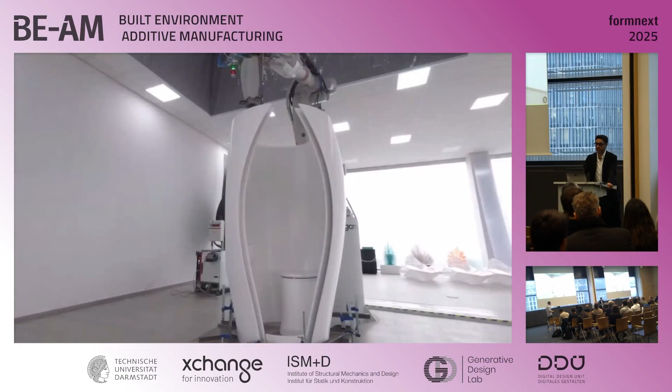So Nagami has been around now for 10 years. Actually this year is our 10th anniversary. In 2013 we started the research at the Bartlett in London, UCL, and 2 years later, with the excuse of a commission from the Centre Pompidou, we decided to embark on this crazy journey. So somehow I convinced my brother and my previous flatmates, who are sitting there, to not sleep for 10 years, and here we are.

Basically, it all comes from the digital. Right now we don't discuss these things, it's assumed, but back in the day, digital in architecture wasn't a thing at all.

Greg Lynn did animate form in the very late 90s. We started thinking about forms and shapes that can be fluid, that you can stop at any given moment in time and materialize in a certain manner, but that is an alive organism.

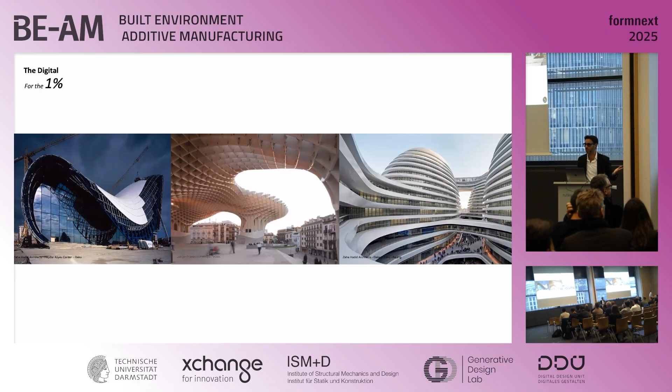The result of that was really hammering through lots of geometric problems, trying to use conventional techniques for materializing these crazy projects. But what came later was a new type of architecture - not just trying to materialize digital architecture through traditional techniques, but actually embedding the future of technology in architecture.

But to be honest, this adoption is becoming rather slow. Construction is the least digitized industry, right after hunting, we were discussing that yesterday. Of course, digitizing hunting wouldn't be that fun.

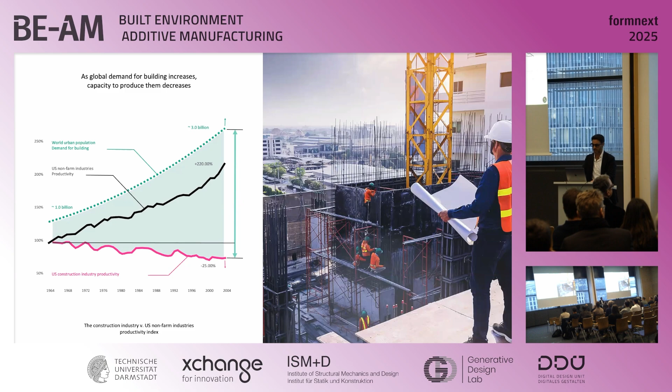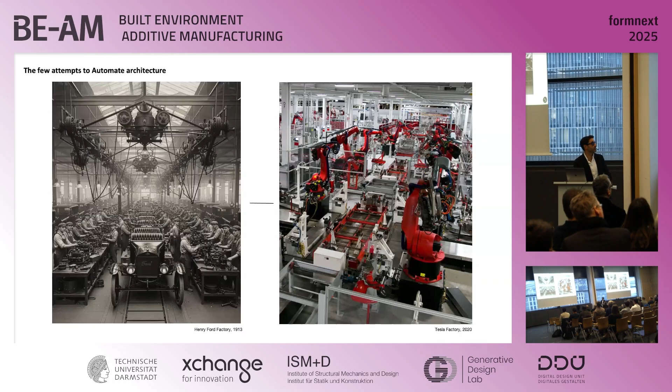And we're actually lowering our production. This graph is from the States, but it could apply almost everywhere. This is how the Henry Ford factory looked in 1913, and right now, obviously, in car manufacturing, things have improved quite a lot. It's a completely different landscape.

However, in architecture, even having that technology - this is one of the most cutting-edge examples of automated architecture, the case of Katerra, which unfortunately went bankrupt - they're really not rethinking design at all. We're still trying to materialize what we understand as a housing building, which was literally the same in the 1930s, in the time of Henry Ford, and we're just trying to automate that process, but not really reconsidering how a building should be and how it should look.

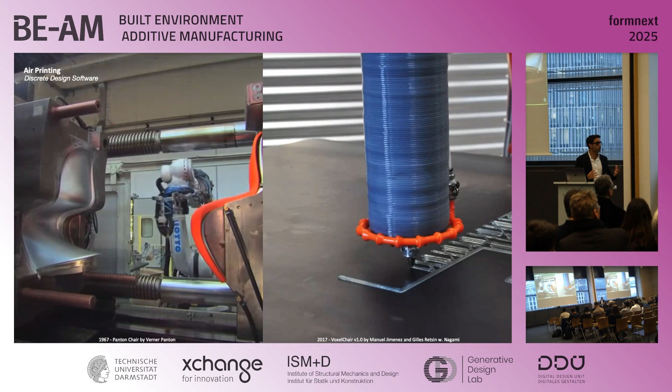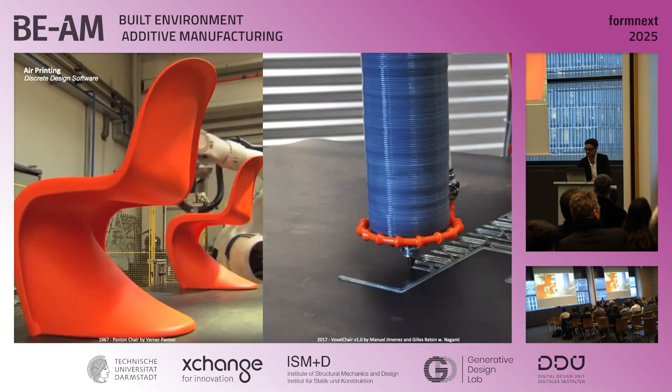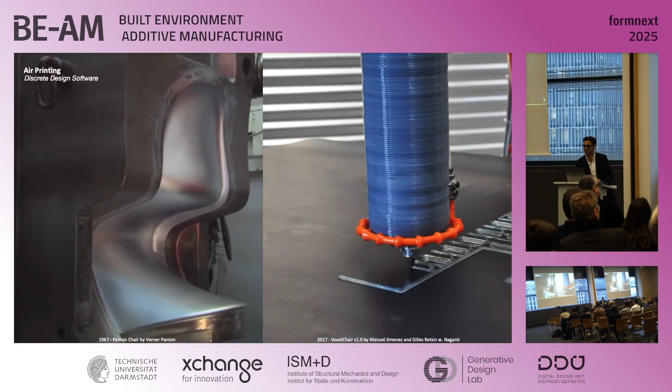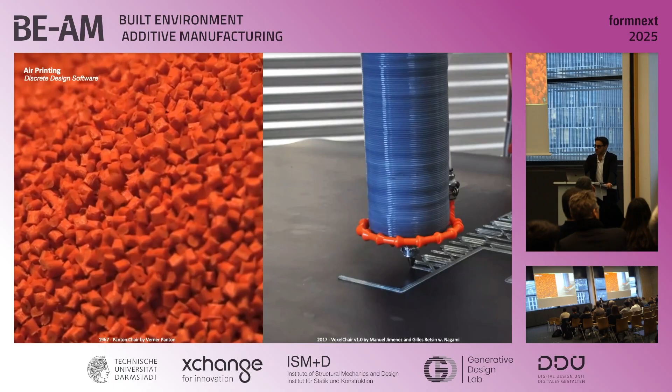In the world of design, this connection with technology is even easier to grasp. The Panton chair was the world's first plastic molded chair, back in the 1960s, not even. But we don't talk about the Panton chair right now because of the technology it used - it was really revolutionary, a new technique for creating new shapes. Right now we talk about the Panton chair and buy the Panton chair because it's a seminal piece of design. And the same thing will happen with 3D printing.

This was also discussed yesterday - this will happen to 3D printing in a short period of time. So probably in the next 5 to 10 years, no one will be talking about 3D printing the way no one talks about plastic molding today. What will stay is the way we use the tool - a tool that will definitely and undoubtedly stay with us forever and already is part of the industry.

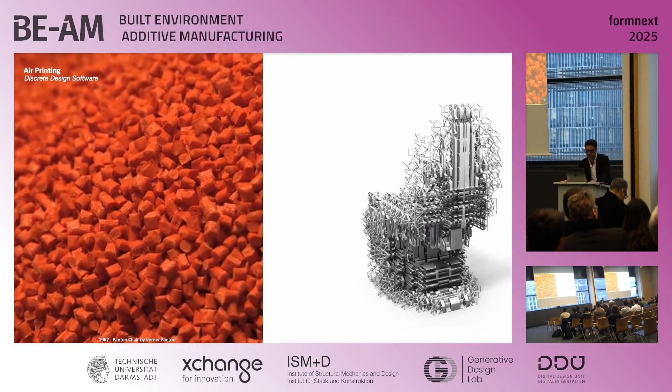We were trying, back in 2015, 2016, when we started Nagami, to really find expressions that are born from an understanding of the technology - forms and lines folded into chairs that truly respond to what plastic extrusion could do. And this was really the beginning.

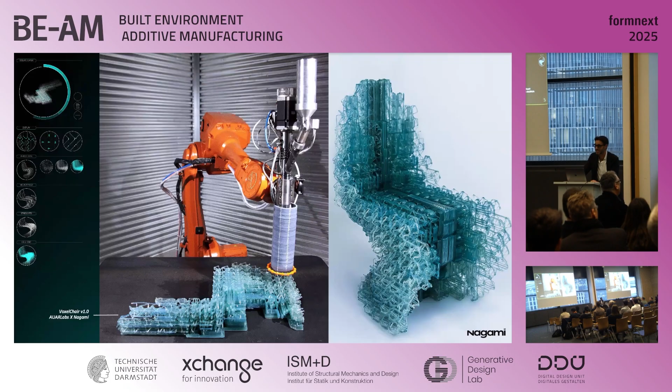This was our first garage with our first second-hand robots in 2016. Back then, my brother and Nacho, my other partner, were just finishing building our extruder. We used our own technology, because there was no Caracol or CEAD or any of these companies building extruders at the time. So we actually had to build our own. In fact, my brother's apartment still smelled like plastic after a year of development. Two architects making a completely novel tool.

But it was important for us to situate waste material - plastic, always recycled or biodegradable or sustainable plastic - on the top side of design.

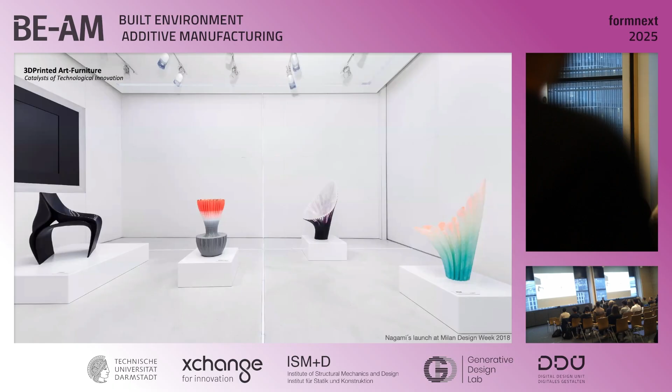We partnered up with Zaha Hadid Architects, Ross Lovegrove, and Daniel Widrig to create 4 pieces that would be impossible to materialize without that technology. We launched them at Milan Design Week in 2018, finding expressions that are even today, almost 10 years later, very difficult to materialize—like printing over an object that's already printed, changing directions, changing colors, with a perfect gradient, pushing some of the limits of 3D printing. As you'll see, I'm not going to play this video, but maybe this other one.

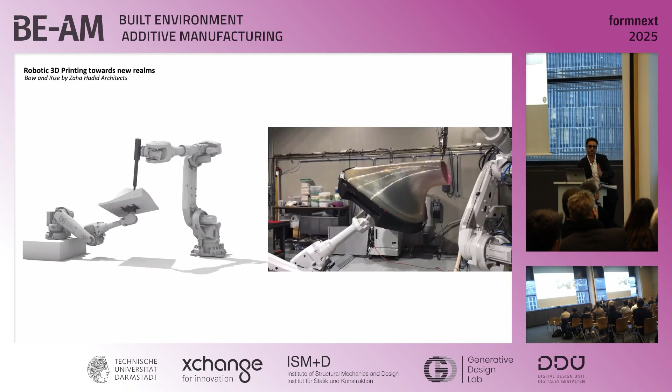Here we pushed the limits of larger scale 3D printing to create angles that go beyond the conventional 30-degree, 45-degree angle—how can we make the best out of this design expression, in this case printing with 2 robots collaboratively.

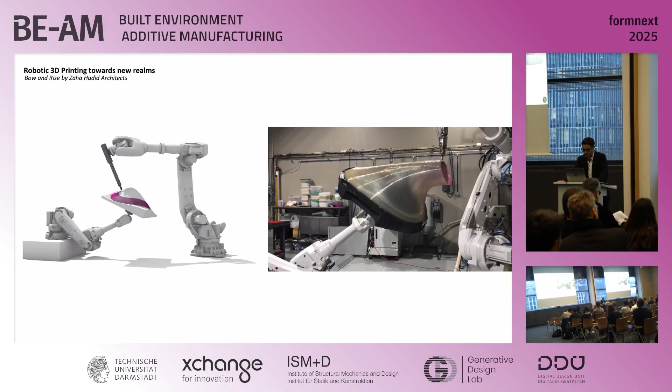That was the way we launched, the way we started trying to create a market for 3D printing. We're talking about 2018, so the only common example of 3D printed chairs was Dirk van der Kooi. There were no brands doing 3D printed furniture, and people were actually afraid of it. When we were exhibiting somewhere, people were doubting if it was okay to sit on the chair because it was printed. Today that's different—everyone just comes to our stand and sits without asking, but that has been quite a challenge.

The biggest challenge was, in creating that market, not making it only for a narrow part of the possible market—marketing, design, and architecture, the collectors, the museums, the ones that can spend 20 grand on a special edition piece—but actually amplifying the reach, widening the market, achieving a very low production cost for 3D printing.

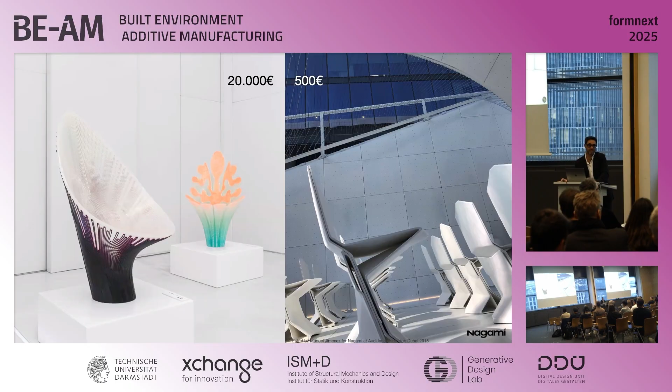There was no example of chairs that could be printed for 300 euros and sold at 500. This is really what makes an impact in the design market.

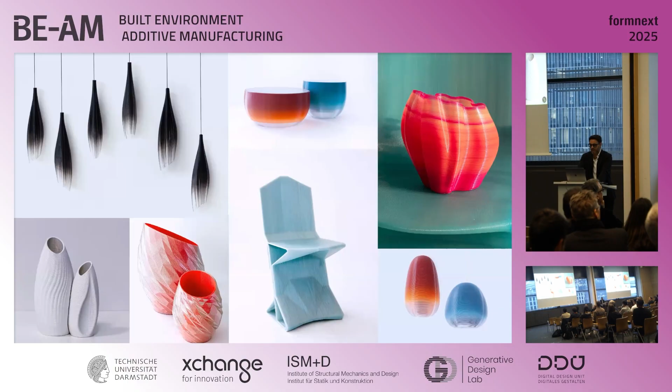So we started growing our catalog, making more chairs, more accessible objects, getting our dogs in the pictures—that was one of the best parts of the story. Getting different colors, different transparencies, different understanding of texture, really making the printing line a form of expression, from the micro texture to the overall macro texture, and combining different workflows.

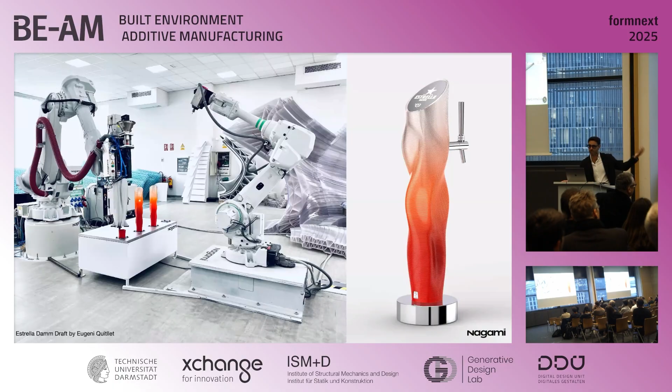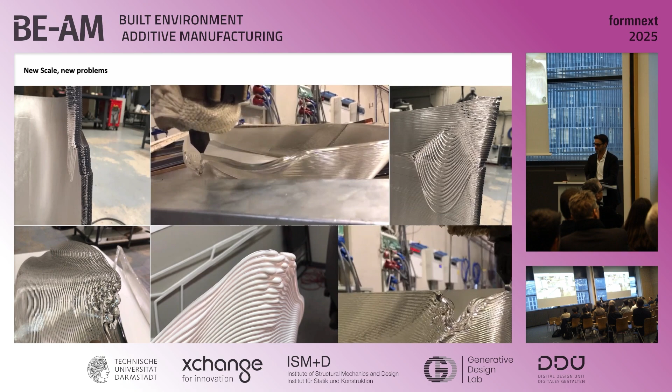Like this beer draft we did with Estrella Damm, where we are printing and CNCing simultaneously, but also taking into account all the possible failures that 3D printing can have at this scale.

We face this a lot with clients or people interested in working with us, asking which format they should send the file in. We always say, just send a sketch and set up a Zoom meeting—the technology is definitely not at the reliability it would be at small scale. We're definitely not a printing service, and I don't believe there is a viable printing service at this scale.

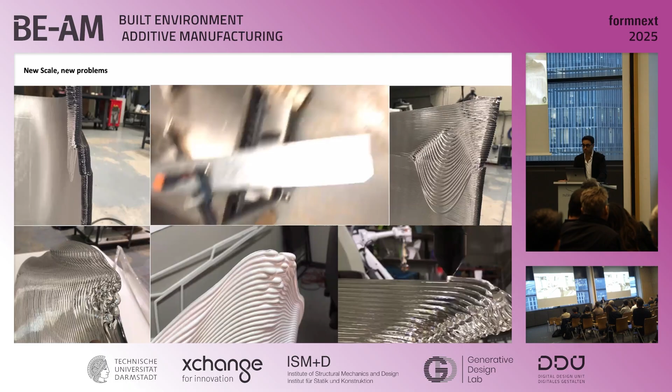There's a more interesting approach where we work together with other designers and other brands to see how to get the best out of the limits and possibilities of 3D printing at this scale. But it's important to know how to push that technology.

For example, this object, this chest, was really pushing the limits—you can see the angles, and probably everyone here knows the technology quite a lot, so we all know it's printed from the side. This took 15 prototypes, 500 kilos of plastic, 300 printing hours, 3 months of rationalization, a lot of fighting, and a lot of headaches.

If we would only sell one piece, this would cost a fortune, and we'd be stuck again in the hyper luxury and inaccessible market. What is luxury in the object but accessible in the price market? For us, that turns a little more conceptual.

It goes back to the understanding of digital architecture, part of which starts to be framed, especially by Patrik, as parametricism. Parametricism postulates itself as the complete opposite of Fordism. Rather than repeating the same single piece every time—Henry Ford used to say it can be any color as long as it's black, so you can't even choose the color—parametricism is the complete opposite: every piece is different. And to be honest, that is actually partly right at this scale.

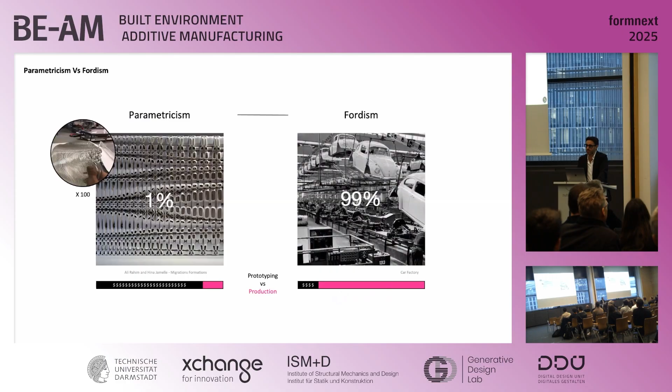And this is what limits the application of this technology to what we always call the 1% of buildings in architectural terms—just the Guggenheims and so on. Because if we want to make every single piece different, and we need that amount of development, we will always incur very high prices.

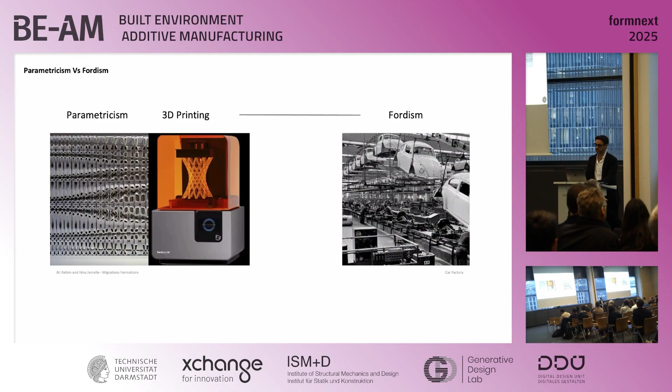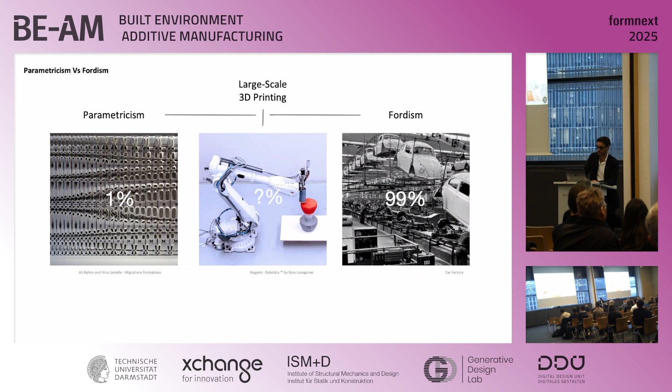So how can we find the right space for large-scale 3D printing? Perhaps 3D printing at a small scale could be much closer to this eternal variation of parametricism. Large-scale 3D printing situates itself in different ground—what we identify as a much higher percentage of adoption in the architectural market, a new space for 3D printed architecture, a sweet spot.

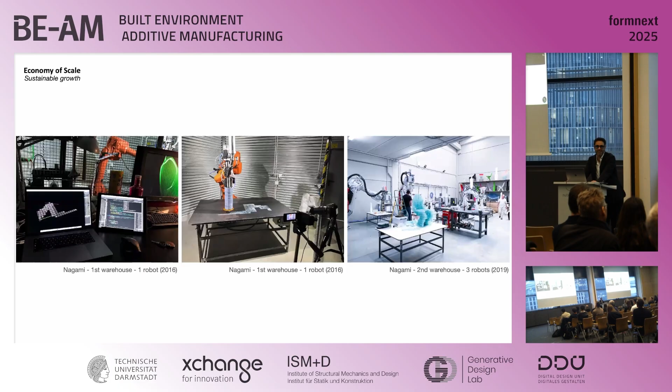So what do we need to achieve that level? First of all, we need to understand 3D printing as a commercial venture. We all started with just one robot, a garage, and perhaps coming from design, from engineering, from fascination about technology.

Today we have 21 robots, and we're really trying to take into account all the stuff that isn't taught in design or engineering school—about efficiency, about cash flow, about really understanding this as a company.

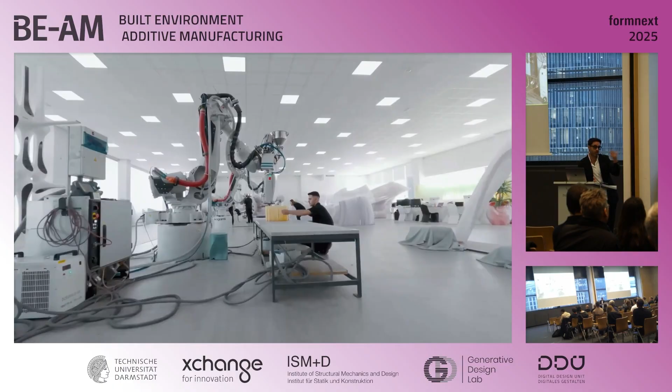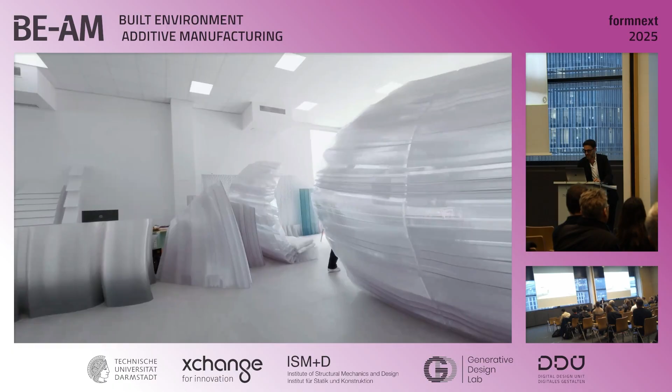What is the optimal product, the optimal rate of manufacturing, and a thousand million things you need to understand to get this into a profitable business. Because otherwise, if it's not profitable, it will just end up dying, and you can't keep innovating. This isn't just about making money—it's because without money you disappear.

This is the lab in the upper level of a 4,000 square meter factory in my hometown in Avila. When we started, we had 5 robots, but we started working on larger projects, and we realized the importance of economy of scale in this kind of semi-industrial business.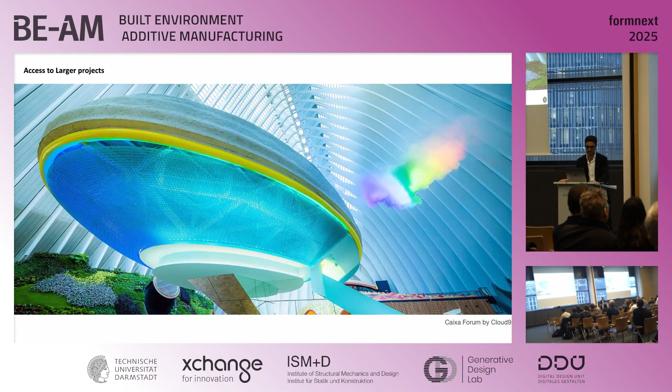So the more robots you have, the lower your production cost becomes. What is the right number of robots for the right number of people, and is that really hitting a competitive price? That question became very evident when we landed a very ambitious project for Real Madrid.

I don't know if someone in the audience supports Barca. I'm sorry—I'm sorry for supporting Barca in general.

So anyway, we basically had 80,000 seats coming from the Real Madrid Stadium, Santiago Bernabeu. We wanted to give the supporters and the fans the opportunity to really transform this seat into something different—a piece of art, a chair, something you can use and enjoy, not just a piece of plastic.

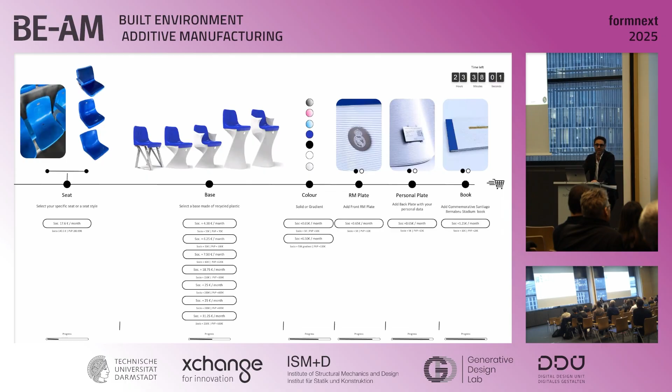So 80,000 is a really large number, and we also made our lives very difficult by giving so many options—there were 7 forms with 7 colors, endless possibilities. We even had to catalog every single seat in the stadium, so there's 80,000 of these pictures.

More importantly, in order to satisfy the possible demands, we had to install 16 new robots. This was only possible because we make our own technology, so it was much more streamlined. We created a new part of the factory in the bottom area with these 16 robots so we could deliver seats in a much shorter time.

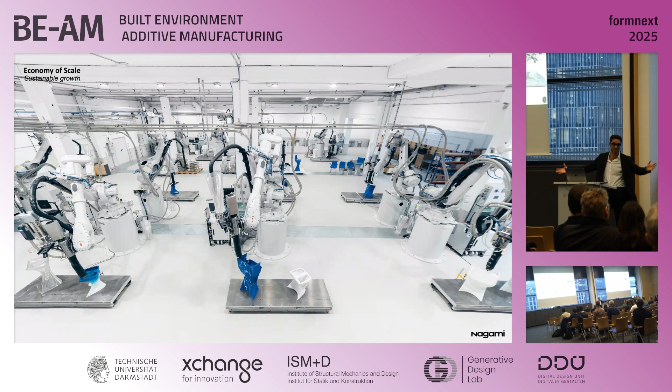So if you can't print faster because of gravity and material properties, then just print more. That was the solution, and it really opened up different opportunities—having a project where you push 3D printing to give so many opportunities to the customer, which you couldn't otherwise. With traditional manufacturing, you'd probably offer just 1 or 2 options of that chair. So this shows how we deal with products, and how we offer customization, but within a controlled range.

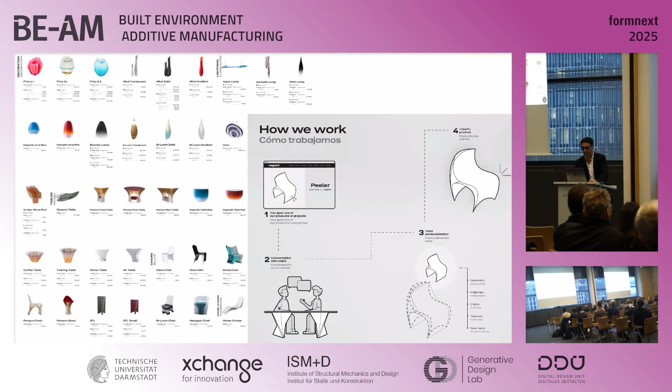So we have a catalog of products with more than 70 references, but we then offer, especially companies, but also individuals, to play out different customization levels with these products.

For example, in this project with the Pereyra Theater in Ibiza, it was a theater closed for more than 16 years, and they wanted to have their own furniture for an edition of 250 chairs, 100 tables of one type, 100 tables of another type, 20 or 200 stools. So it's very short numbers, and there's no technology in the world that could make that like a particularly designed product for just 250, at least at an affordable price.

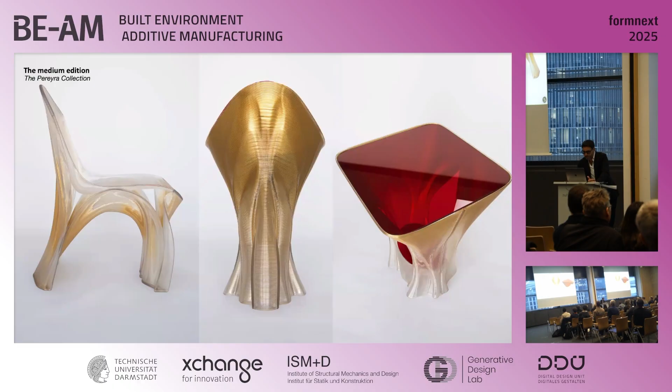And that's where 3D printing becomes the only viable solution. But you also need the capacity to respond to such demand. In the end, it's perhaps like 900 different products to be delivered in a couple of months, so if you don't have 21 robots, you will really struggle to deliver this on time. So we start to play out this idea of being in between personalization, the promise of 3D printing, and getting closer to mass production. It's kind of a field somewhere in between.

The same thing happened with Porsche. Porsche came, saw the chair at Pereyra, loved it, but they wanted a version just for them. So again, a very short edition, 300 chairs made for Porsche, that then started to multiply into the entire atmosphere of this pavilion they were using for launching the new Macan. Getting the textures of the chair into the bar, the chandelier, other products, and even using their space as an arena for launching new products, like these chaise longues and chairs with Karim Rashid.

And all this starts to pose a much wider and probably more important question. I'm an architect, so I ask this about architecture, but you can apply it to your own field: why 3D print architecture? Of course, there's a simple answer - one machine, infinite number of products, so you don't have to deal with stock.

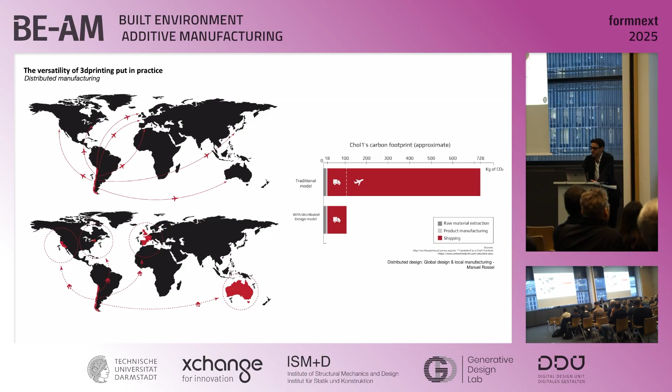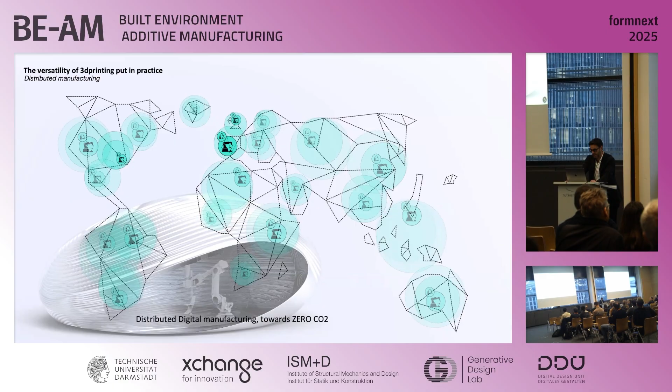Then, another answer this audience knows well: distributed manufacturing. If we manage to increase or widen the market for 3D printed architecture, and have 3D printed hubs in every continent, we would spend much less CO2, and it would also become cheaper, reducing taxes and so on. So we're now talking to distributors and I'm planning to expand the business to different continents this year, to really start working locally with a material we consider an unfortunately unlimited source.

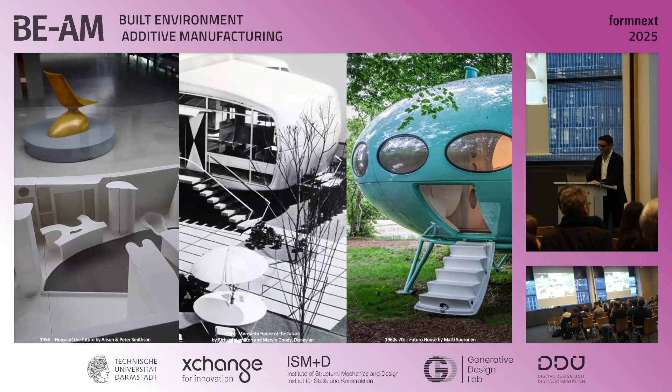In the 60s and 70s, we were dreaming of inhabiting plastic capsules, with fiber reinforced plastic, and having furniture that would come out of the wall, becoming a continuous and personalized space. It all died in the 90s for a simple reason: scientists already knew plastic was going to be with us forever, but in the 90s they uncovered it, and that's what eradicated that whole movement.

But today we have 8 times more weight in plastic waste than in people. So each of us is equivalent to 650 kilos of plastic, which is insane, and this is growing. And again, we're not going to live without plastic, so how can we start increasing the demand for this material?

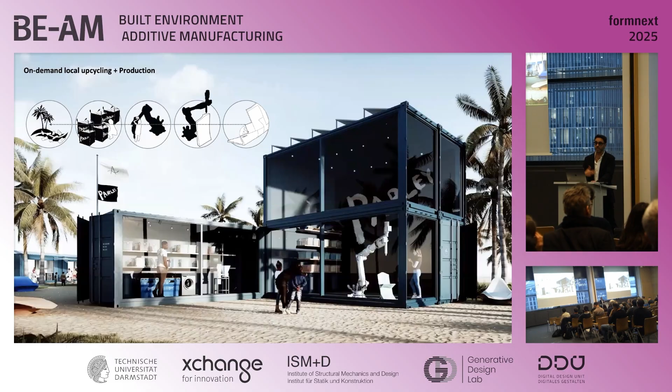We've played out different scenarios. Can we work with environmental organizations like Parley for the Oceans to recycle on site and transform, creating local economies? We've tested this model with on-site printing in Selfridges, in COP26 in Glasgow, and we're really trying to get that model into an industrial setup. So that's probably, if I come next year, hopefully we'll see how Nagami starts to be in other continents as well.

And it all started with chairs. Architects love testing ideas in chairs. Chairs are mini buildings, so they need to resist a human body, and it's way cheaper to test things in chairs than in buildings.

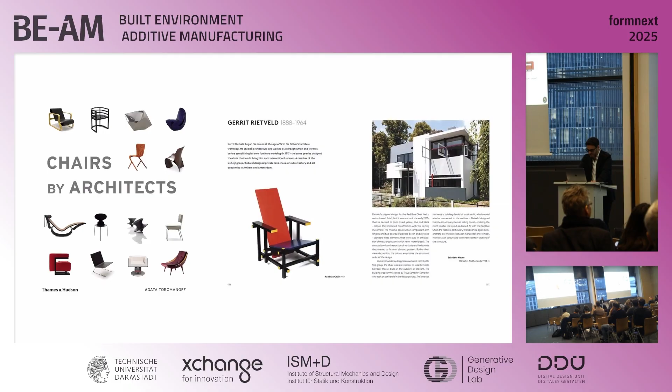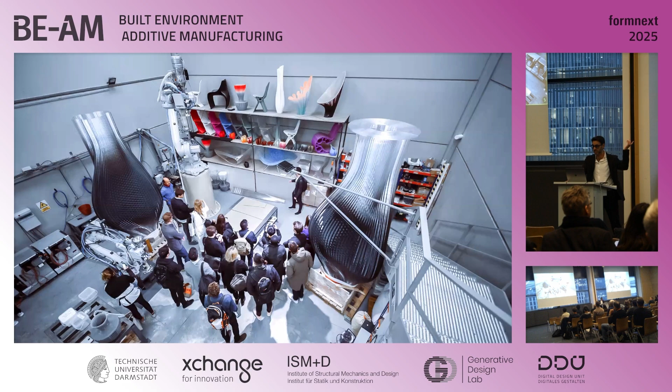For obvious reasons, every seminal chair is actually testing architectural features. So we started going from chairs to much larger elements.

Like this sculpture we did with Ross Lovegrove, 3.5 meters, that we printed in 48 hours. Today we could print it in around 30 something.

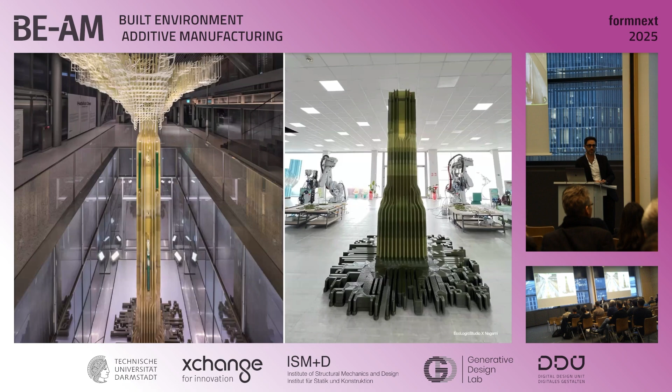And how can this large scale for real start to become architectural? Can we go to 12 meters assembling pieces? And how can we assemble these pieces? So we start really dealing with questions that have been present in architecture forever, but that we didn't have to rethink because we didn't have another technology.

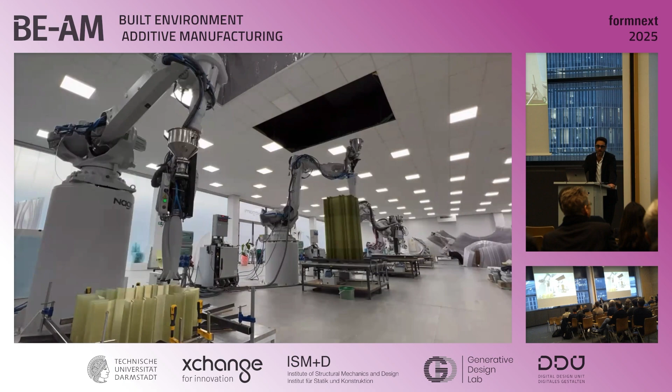Like how can you connect efficiently two 3D printed pieces? How can you waterproof 3D printing? How many layers do you need to have? What is structurally viable? Fire testing, coating, etc. So there are so many questions that start emerging when you go to this truly large scale.

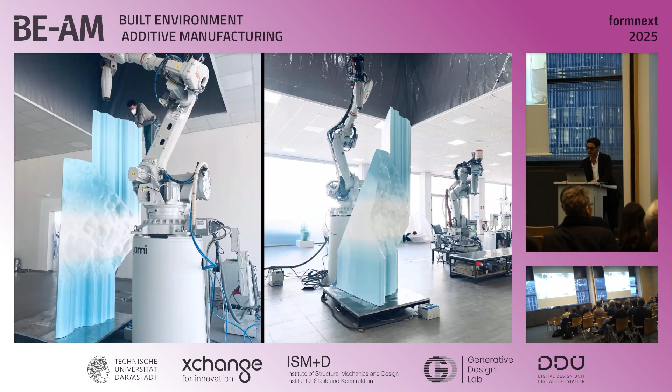And we tested this in different scenarios, like this 3.5 meter sculpture with Nicolo Casas, partly for the oceans, or this facade we did for Christian Dior in Marbella, where we really needed to investigate the deformation of the panels so that we see what's the maximum size that we can print.

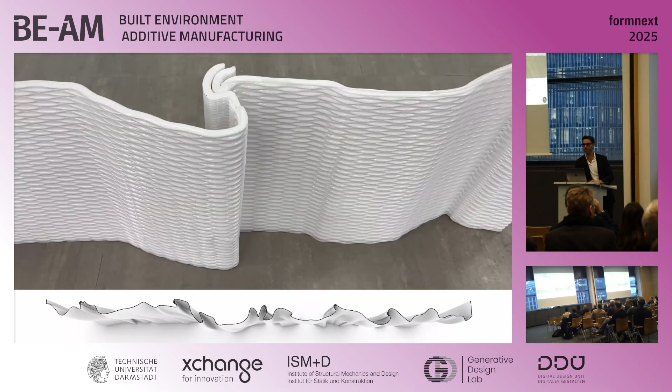Connections are now becoming part of our everyday life. We think more about connections than other parts of printing features. 3D printing allows us to hide these connections, to give this effect of continuity, like having 9 meters in 6 panels that really look like one, to really start playing with the continuity of lights, and really go into retail spaces and make them shine.

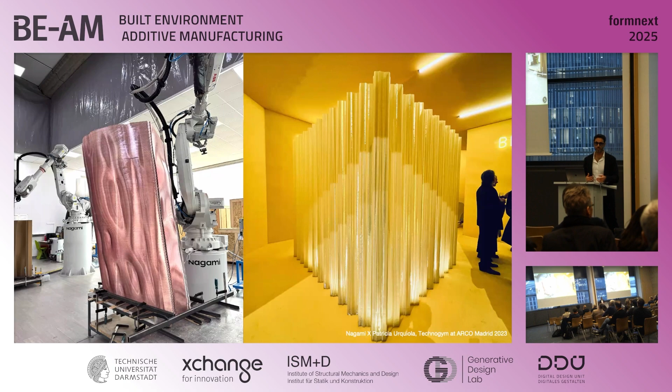Create something completely particular for them that is also kind of screaming sustainability. Most of the time we work a lot in high-end retail especially, and also in hospitality. These guys are renewing their shops every 6 months depending on the brand, and they used to just take it all and throw it to the bin on one night. We take the material and shred it in our own facilities and repurpose it.

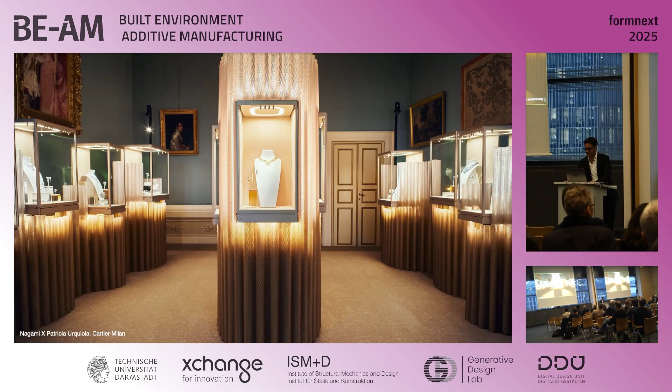And we're working in that direction with different brands. Many of them I can't talk about yet in this presentation, but we've been showing a little bit, this is Cartier, for example, with having kind of their own expression, their own texture.

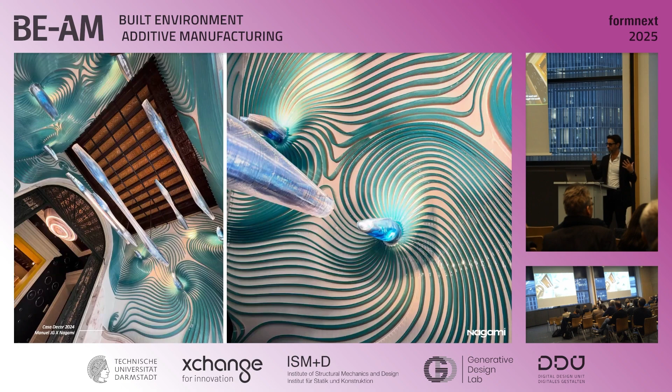We've investigated in the full interiors where the furniture, the lamps, the lighting becomes part of the whole ecosystem that gets expressed from the walls. We've created prototypical rooms where different types of 3D printing are living together and also combined with more rustic operations or material elements.

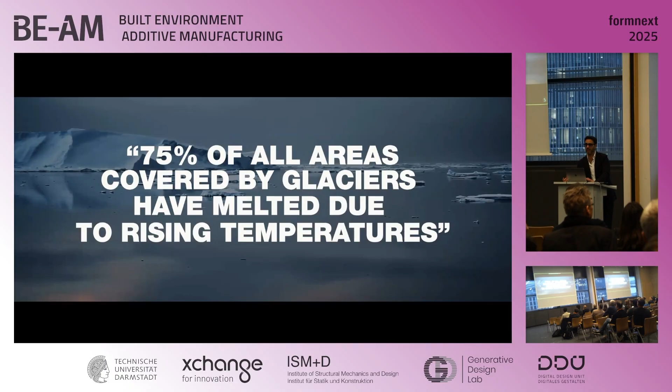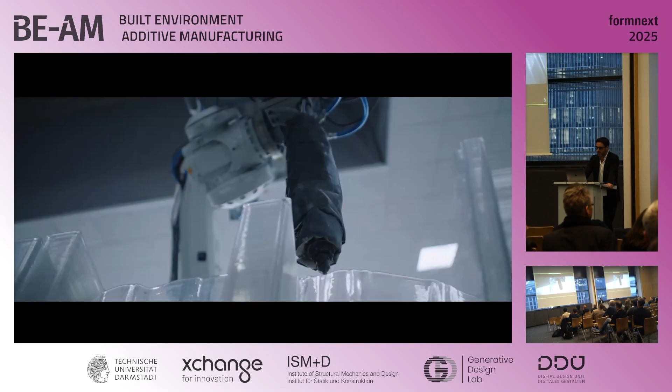This is a very special project for us with EcoAlf. EcoAlf is an incredibly responsible brand. They only work with sustainable materials, especially recycled plastic. They have an incredible network of fishermen taking plastic from the ocean and transforming it into new clothing. So they wanted to represent this idea of inhabiting a glacier that is cracking and melting because of climate change, and this really expresses the way we work.

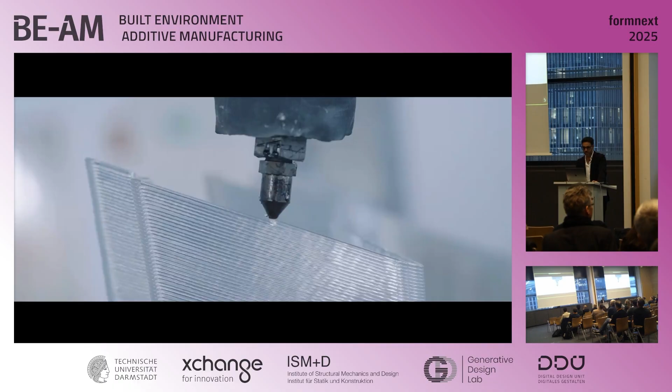So we take a brand, a designer, or someone that wants to materialize an idea that is impossible to make with other kinds of techniques. How can you create this texture that looks like snow and ice that is melting slowly and suffering the wind going through it? How does that really become an expression of the brand, and how does this get materialized from the furniture to the walls to the whole environment?

How can we take this technology and use it as architects? In this case we're doing the entire interior, going from the decision of the flooring, which is not 3D printed, to the 3D printed expression in the walls and the furniture. How can this also become a structural understanding of the material? Like Robert was talking about the septa chair, where you need to fold the material, where you need to reinforce parts.

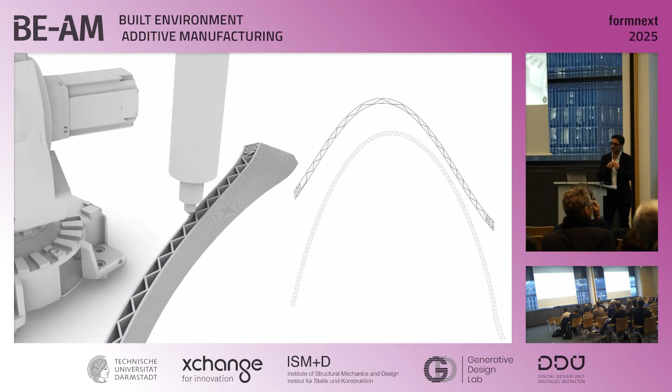You should try to use the material only where and when it's needed, right? So how can this become a structural principle? You can go from a piece that has very dense material to very porous and much lighter.

We used to run structural analysis, for example, in this vault structure. But there is also now a printability analysis. So this is the optimal shape structurally, and this is the optimal shape for printability.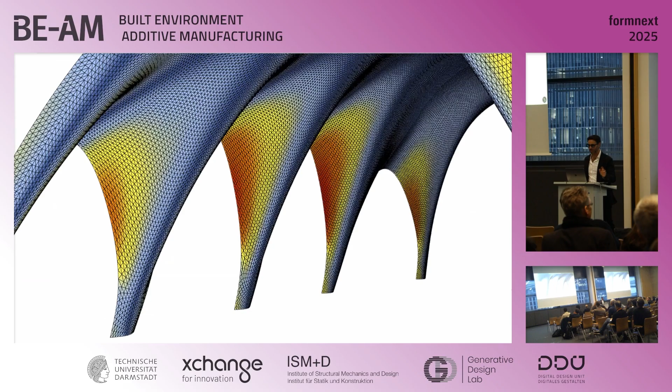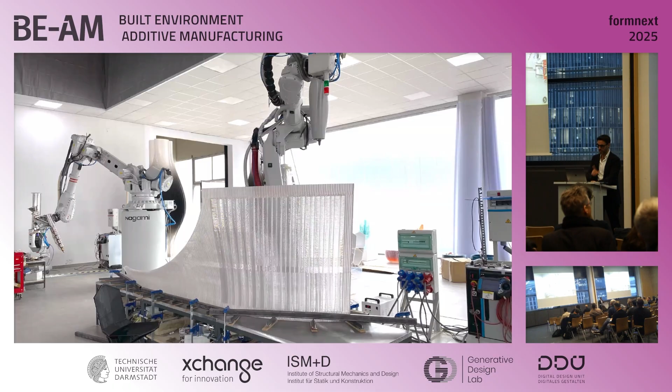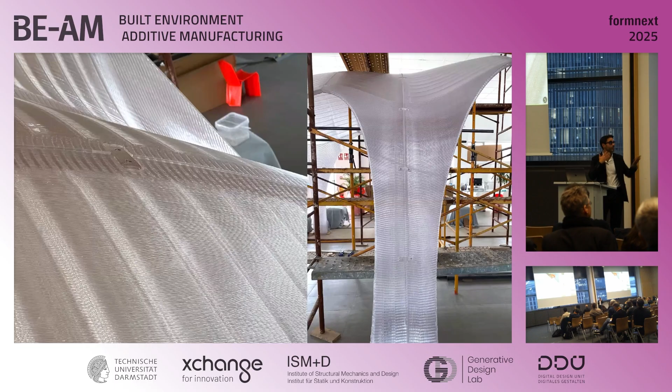And how can you start to balance out these new conditions? And how this starts to be an expression in the way the building or architectural piece or product looks at every part of it. You see here parts that become more porous with parts that become denser and more opaque. So it's expressing the structure, expressing the way it's connecting, really creating another kind of connectivity between pieces, also based on 3D printing features.

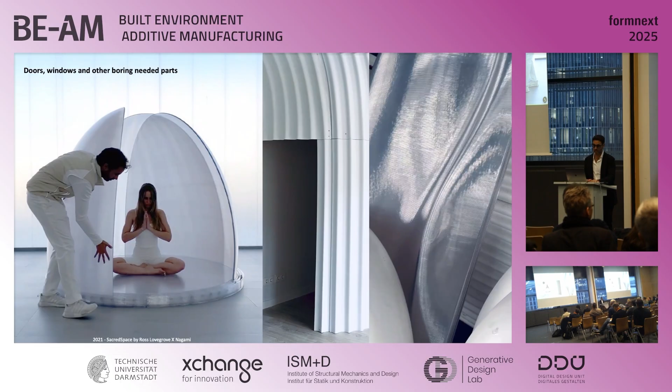So this is something we're really using for testing new ideas on how to reconceive architecture, in this case through 3D printing. How can you integrate channels? How can you make pieces that move? What is a 3D printed door? We made this door, for example - you see in the image on the right that probably you're not realizing, but that's a 3D printed handle. So every single part of architecture needs to be rethought so that it's efficient with this new technology.

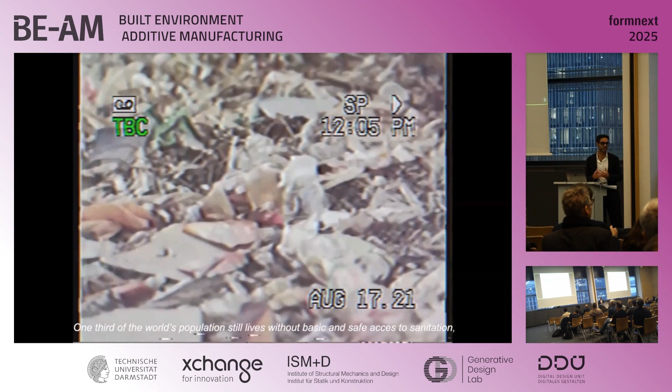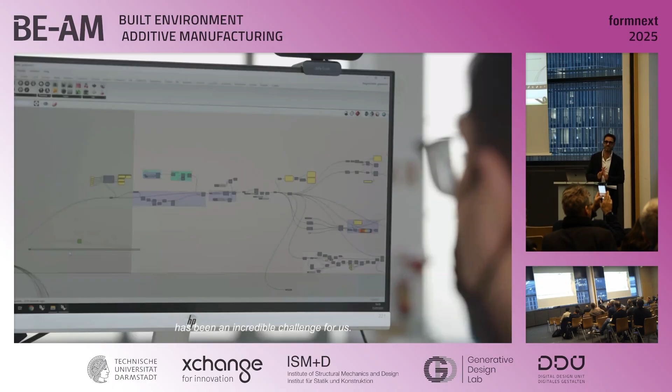We put together some of these ideas in this project that we really love, which is a portable toilet. And we love it not only because it's again investigating new features - here we're creating a sliding door, integrating a toilet within the print - but also because it gives us tools for rethinking objects that we have assimilated for a very long time.

If I ask you guys what is a portable toilet, you all remember the horrible toilets that when you go to a hospital, to a festival - it's probably the worst. Hopefully no one here has designed any of those. I'm just going to say it's the worst design ever, and it stayed forever with us. We see it everywhere. So how can we really rethink objects that we consider just stuck in a certain shape through 3D printing, and also make that in a sustainable manner?

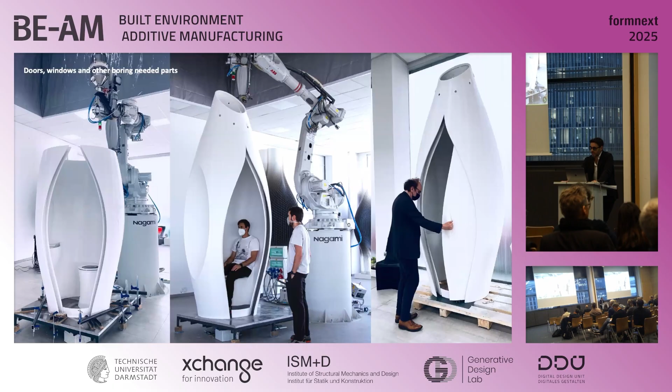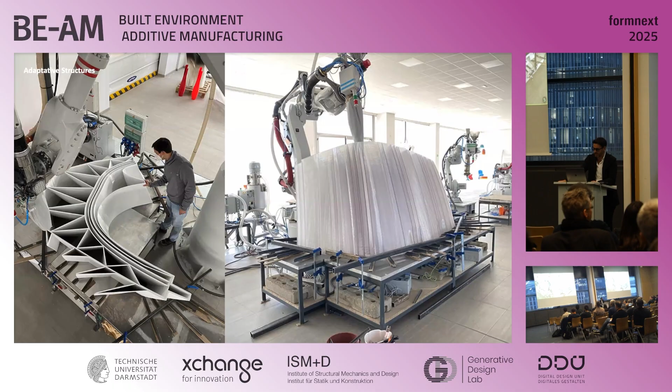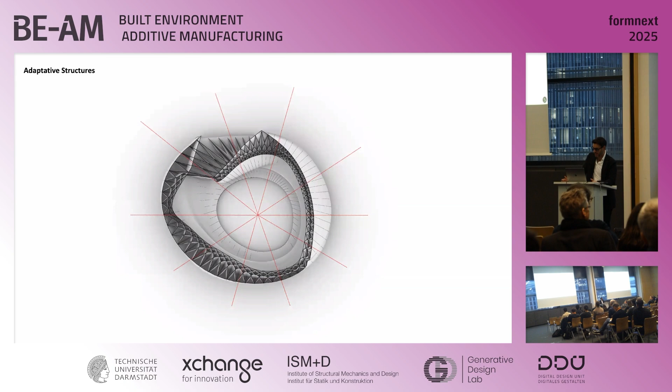So all this kind of research starts to lead to smaller conceptions of buildings. We're really going step by step from chairs to large sculptures to interiors to small pavilions. In this case, this is a 9-meter diameter pavilion where we're investigating the structural properties of plastic, but also how can you make a facade, how can you do waterproofing, how can you connect different pieces, how this building becomes a three-dimensional conception of material. And how that can simplify the printing process while dictating the way this should look - it's really looking this way because of the pieces that are going to be printed.

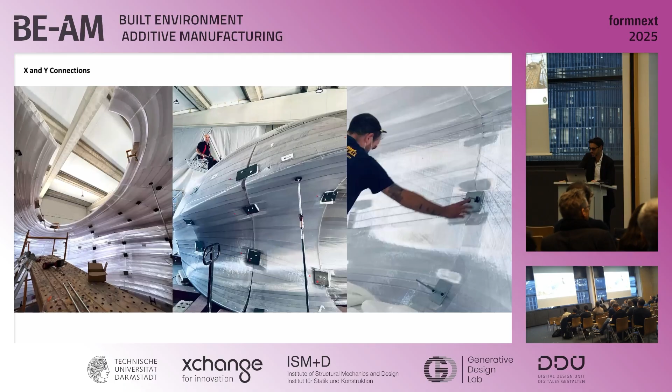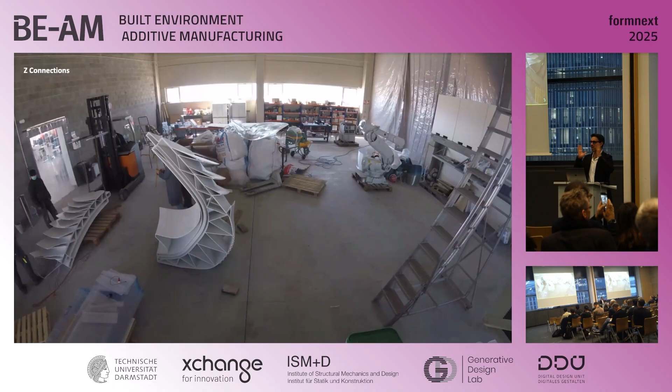So this is an ongoing research that hopefully will finish soon, where architecture becomes almost like a Lego for grown-ups. How can you connect pieces of architecture rather than having layers and layers of material? If you look at any building, you'll have the structural layer, then the insulation, then the facade, then - right? How can this be simplified through 3D printing?

So I tried to understand your sweet point, correct me if I'm wrong. What I took from it is like a limited amount for very exclusive clients - that's the sweet spot for 3D printing right now. Not really, actually, because from my experience the material can be relatively cheap, but the printing hours are extremely expensive. So how do you see that? Because it's almost unfixable - I believe even with 25 robots you count 1 hour per, how many euros per hour, you know? So that's my question.

It's a very interesting question. What we're starting to discover is the economy of scale of 3D printing. Just to picture it easily: if you have 1 robot, you need at least 2 people, because someone has to stay with the robot. But you also need your core staffing - marketing, sales, administration. So your ratio between staff and machines is very favorable for staffing. You might end up with only 1 robot but 5 people, if you have a very slim company with very small production capacity. In our experience, things start to work out with 5 robots or more, where those 2 or 3 people can be dimensioned correctly for attending 5 robots, and you can start having the main core of the company.